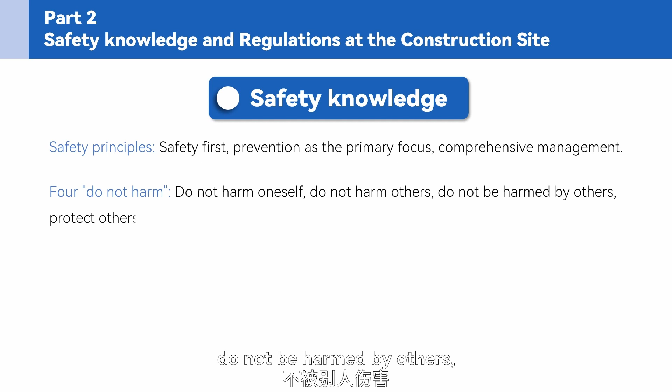Next, let's delve into the second part, safety knowledge and regulations at the construction site that masons must be aware of. Safety knowledge at the construction site includes safety principles: safety first, prevention as the primary focus, comprehensive management. 4 Do-nots: do not harm oneself, do not harm others, do not be harmed by others, protect others from harm. 3 Safety items: safety helmet, safety belt, safety net.

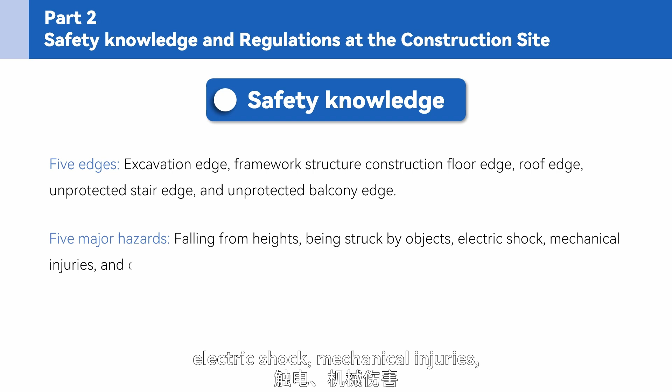4 Openings: stairwell opening, elevator shaft opening, reserved hole opening, passage opening. 5 Edges: excavation edge, framework structure construction floor edge, roof edge, unprotected stair edge, and unprotected balcony edge. 5 Major hazards: falling from heights, being struck by objects, electric shock, mechanical injuries, and collapse. 3 Violations: violation of command, violation of regulations, violation of labor discipline.

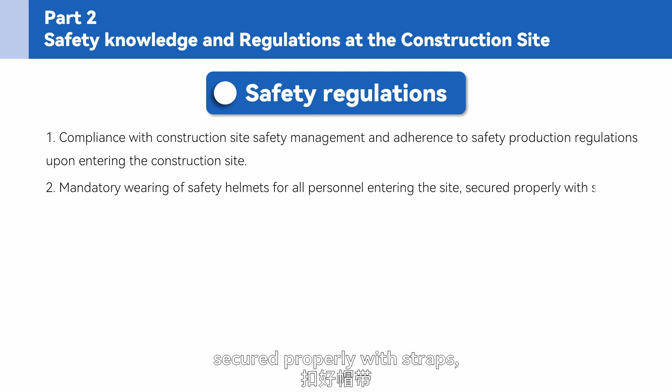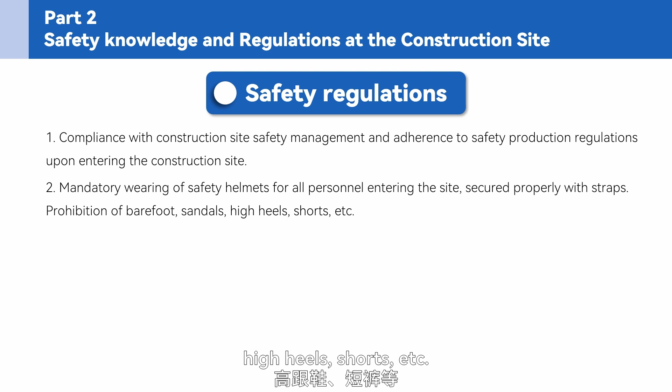Safety regulations at the construction site include: 1. Compliance with construction site safety management and adherence to safety production regulations upon entering the construction site. 2. Mandatory wearing of safety helmets for all personnel entering the site, secured properly with straps, and correctly use personal protective equipment. Prohibition of barefoot, sandals, high heels, shorts, etc. 3. Strictly prohibit alcohol consumption on site or allow non-site personnel to enter.

4. Use of safety belts and securing safety hooks for suspended work above 2 meters without safety facilities. When working at heights, it is strictly prohibited to indiscriminately throw materials and tools downwards or upwards. Disassembled materials must not be thrown haphazardly, and during disassembly operations, personnel must be stationed below for supervision. 5. Compliance with scaffolding material and erection specifications.

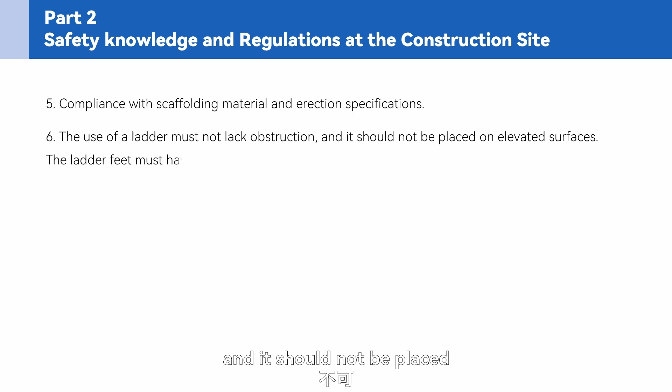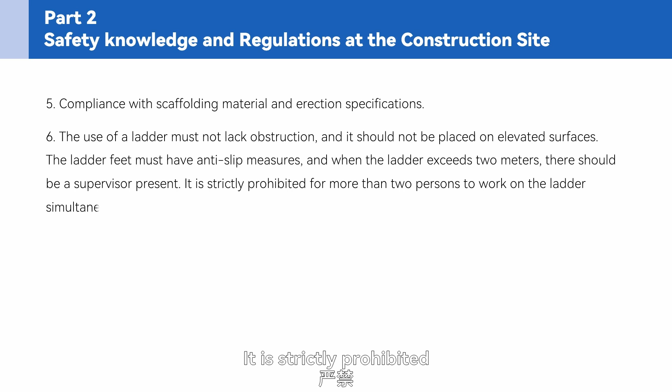6. The use of a ladder must not lack obstruction, and it should not be placed on elevated surfaces. The ladder feet must have anti-slip measures, and when the ladder exceeds 2 meters, there should be a supervisor present. It is strictly prohibited for more than 2 persons to work on the ladder simultaneously. For A-frame ladders, there should be a securely fastened rope in the middle. 7. Temporary electrical boxes must be well maintained and free from damage. Damaged electrical components must be promptly replaced.

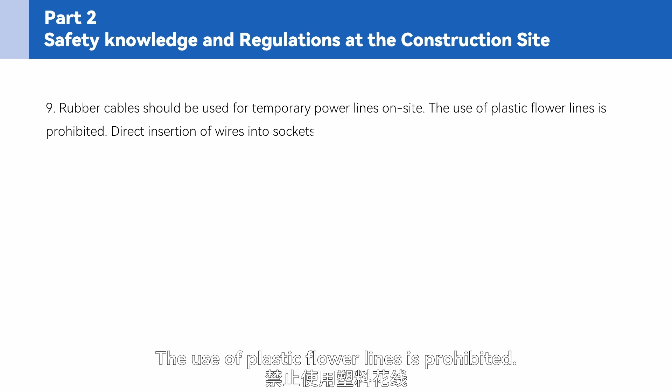8. Separate power sources for illumination should be provided, and there should be secondary protection. Each electrical device should have its own switch, and connecting multiple devices to one switch is strictly prohibited. 9. Rubber cables should be used for temporary power lines on site. The use of plastic flower lines is prohibited. Direct insertion of wires into sockets is strictly forbidden. 10. Maintenance of protective devices on equipment, especially for tools like abrasive sawing machines, ensuring reliable grounding or zero protection.

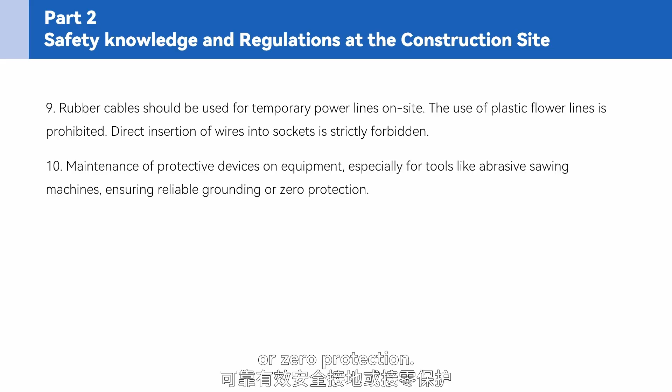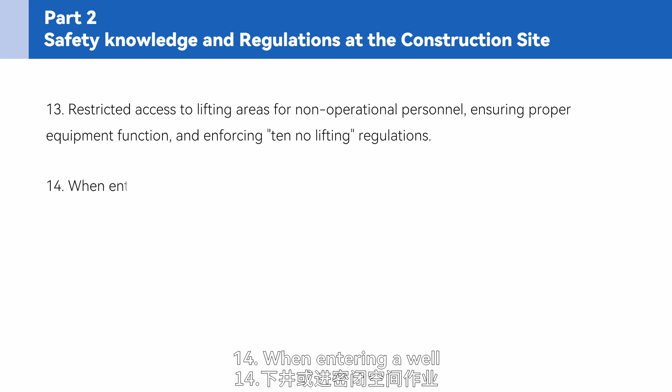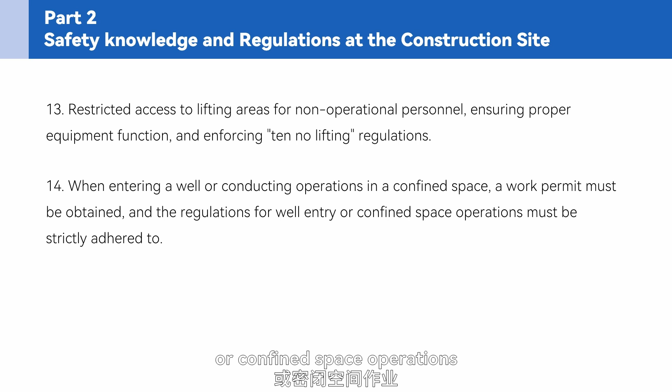11. People who do not understand electrical and mechanical operations are strictly prohibited from using or playing with electromechanical equipment. 12. Emphasis on the maintenance and upkeep of construction equipment, prohibiting operation with defects or overloading. 13. Restricted access to lifting areas for non-operational personnel, ensuring proper equipment function, and enforcing 10 no lifting regulations. 14. When entering a well or conducting operations in a confined space, a work permit must be obtained, and the regulations for well entry or confined space operations must be strictly adhered to.

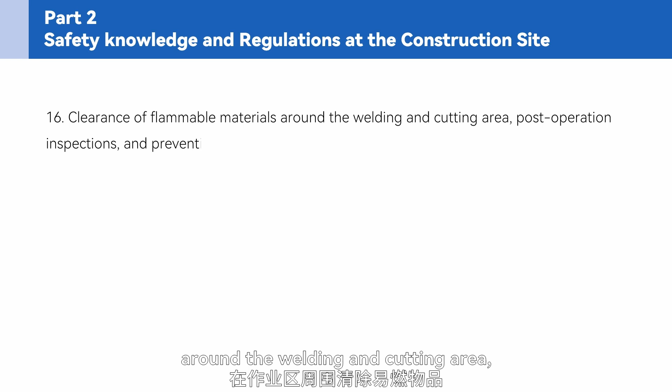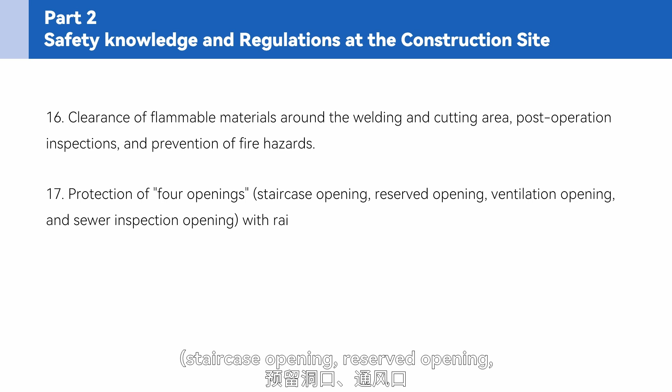15. Neat stacking of construction materials and equipment on site, avoiding obstruction of main pathways. 16. Clearance of flammable materials around the welding and cutting area, post-operation inspections, and prevention of fire hazards. 17. Protection of 4 openings: staircase opening, reserved opening, ventilation opening, and sewer inspection opening, with railings or cover plates. 18. Placement of warning signs in hazardous areas such as cliffs, steep slopes, passage openings, and hole openings, with the use of work lights for nighttime warnings.

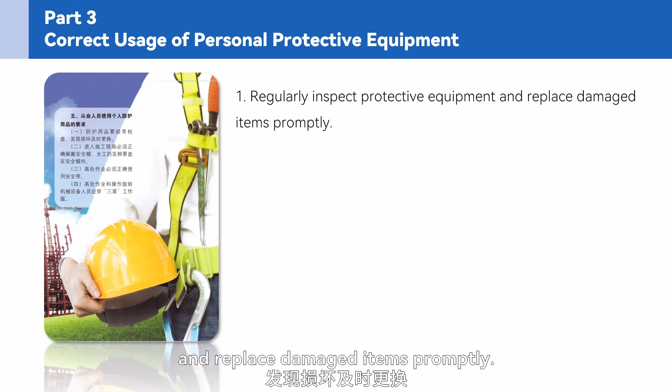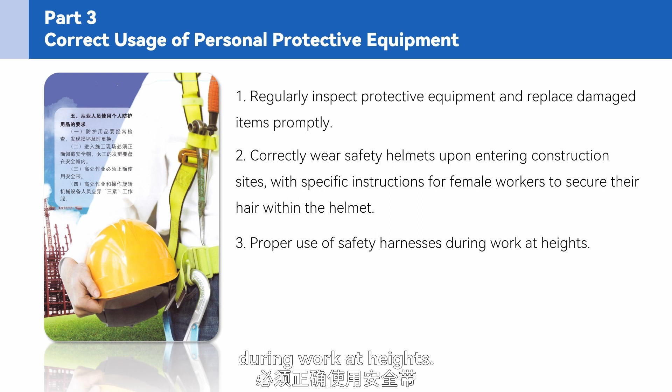Finally, let's learn about the correct usage of personal protective equipment. Personal protective equipment includes safety helmets, safety belts, anti-slip shoes, dust masks, etc. Requirements for the use of personal protective equipment by construction workers: 1. Regularly inspect protective equipment and replace damaged items promptly. 2. Correctly wear safety helmets upon entering construction sites, with specific instructions for female workers to secure their hair within the helmet. 3. Proper use of safety harnesses during work at heights. 4. Workers involved in elevated work or operating rotating machinery must wear 3-tight work clothes.

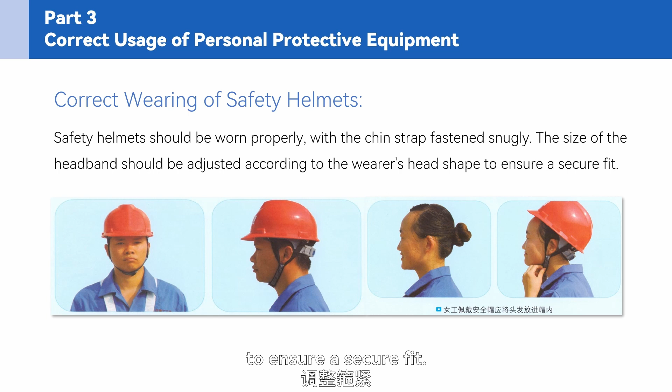Before wearing a safety helmet, it should be inspected for any damage to the shell, lining, chin strap, and headband, such as cracks, cuts, abrasions, or corrosion. Correct wearing of safety helmets: safety helmets should be worn properly with the chin strap fastened snugly. The size of the headband should be adjusted according to the wearer's head shape to ensure a secure fit. Female workers should tuck their hair inside the helmet.

Before using a safety belt, it should be inspected. The inspection primarily focuses on the metal buckle, connector, strap, and safety rope. Metal components like buckles and connectors should be free of bending, wear, scratches, or breakage. Straps and safety ropes should be free of any fractures, cuts, wear, loose seams, burns, or corrosion marks. In case of any damage found in the safety belt, its use should be discontinued.

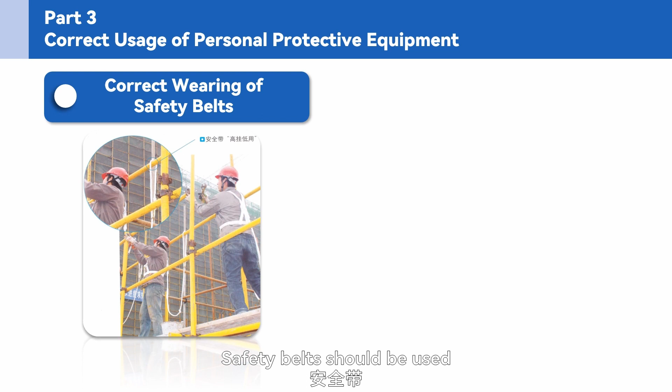Correct wearing of safety belts: adjust the metal buckle and straps of the safety belt until it is snug around the body without restricting movement. Insert the safety rope into the strap, preventing it from dangling outside to avoid tripping hazard. Safety belts should be used with a high-hanging and low-usage approach. 3-tight work clothes refer to garments with tight lower hems, tight cuffs, and tight pant legs. That concludes our lesson for today.